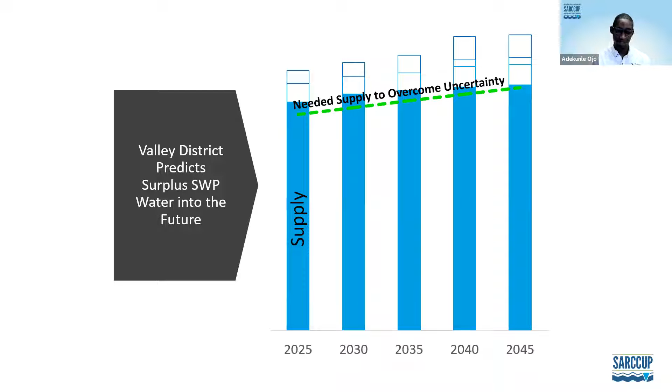Next slide. And we just want to show you that this is no wishful thinking. We've had surplus State Water Project water in the past, and even in the face of climate change, as indicated in the last slide, we're still forecasting future surplus State Water Project water. As you can see, between the decade of 2002 to 2012, Valley District sold to Metropolitan almost 220,000 acre feet. That's a lot of water. Next slide.

This slide depicts that in addition to the projected surplus water from Valley District, the State Water Project itself has surplus water in wet years. Depicted here is the period between December 2016 and March 2017. What you can see between February and March is additional wet year surplus that Valley District can have access to, and when that becomes available, it can be provided to our partners.

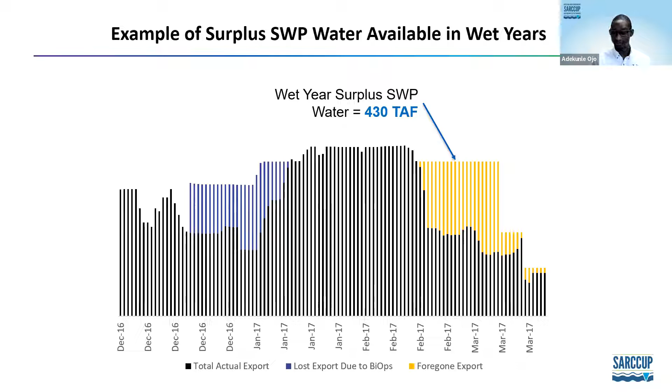As indicated in the previous slide, you can see that in the past, when surplus water was available, Valley District sold it to Metropolitan Water District. Part of the challenge with this arrangement is that the water was not necessarily stored in the watershed.

In setting up SARCCUP, one consideration is how do we keep some of that surplus water, when available, within the Santa Ana River watershed? So this is the initial thought: Valley District, when it has surplus water, will provide it to Yucaipa Valley Water District and San Gorgonio Pass Water Agency, up to 5,000 acre feet. The reason being that Valley District, as well as the Pass Agency, are state water contractors, and Yucaipa Valley Water District is a common customer in the Calimesa area.

After the initial 5,000 is provided, any surplus water is then provided to Metropolitan, and Metropolitan provides it to the watershed. However, Metropolitan was not very happy with that arrangement. There's some governance and institutional reasons why it might not be feasible to provide the entire surplus water provided to Metropolitan to the watershed.

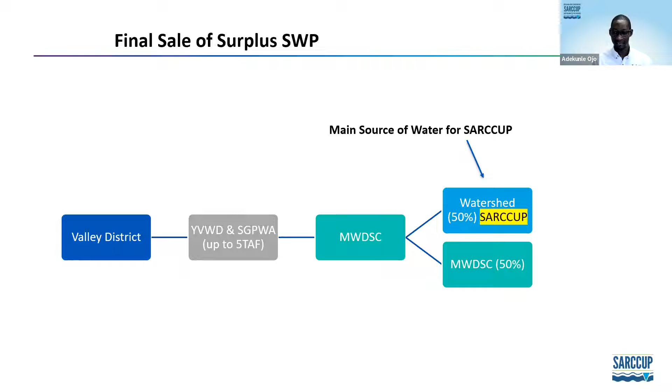So a compromise was reached. Yucaipa and San Gorgonio will still get up to 5,000 of the surplus, and when it's provided to Metropolitan, the compromise was that Metropolitan will provide 50% of the available surplus to the neighboring agencies, and that is SARCCUP.

Again, to remind you, up to this point, what is Valley District's role in SARCCUP? Valley District's role is providing the water that its neighbors then store in the SARCCUP program. So Valley District, at the top of the watershed, is a state water contractor providing its surplus water to neighbors who are largely Metropolitan member agencies, and they obtain the water and they store it.

There are three elements in the SARCCUP program: habitat improvement, being number one - Arundo removal and Santa Ana sucker fish habitat restoration, which Adam might touch on later. There's a water use efficiency component to it, and the largest component is the groundwater bank, with the goal of storing wet year water. When there's flood, when there's a lot of liquidity in the system, storing that water to serve up to 3 dry years in the future.

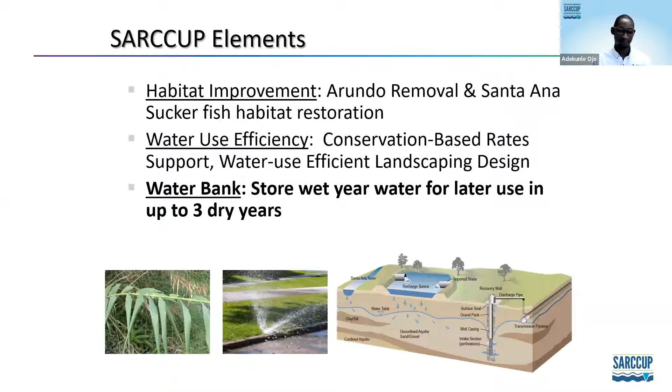As indicated in the previous slide, the largest component of SARCCUP is the groundwater bank. The partners received a $55 million grant as part of the Proposition 84 grant. I want to say thank you to the Santa Ana River Watershed Project Authority and the state taxpayers for making that grant possible. But the groundwater bank is the largest element of both the grant as well as the overall program, costing about $162 million.

Storage is the great equalizer. Just like many of us, we save for uncertainty. I compared this to some of us who have the promise of a pension, but because we don't know what the future holds, we lay on top of that a 457 plan, a 401A plan, some brokerage accounts, some savings, just so that we are well prepared for the future. And this is no different.

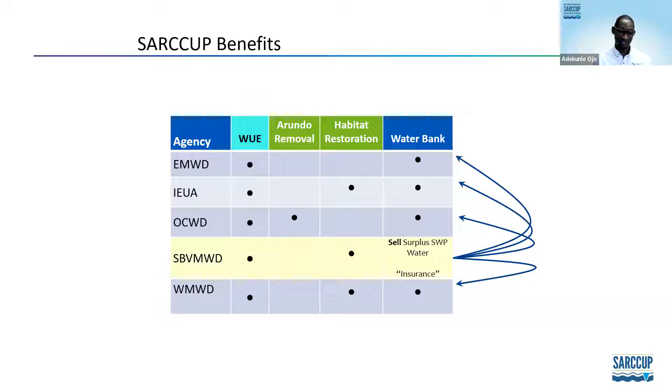On this slide are the program elements and the benefits. One thing you'll notice is that every agency is part of the water use efficiency element. Orange County Water District is the only agency in the Arundo removal. Arundo is an invasive plant that consumes a lot of water, so taking that plant out of the watershed reduces water consumption and evapotranspiration. You'll also notice that on habitat restoration, you have a couple of participants, but on the water bank, every agency is participating. The water coming from Valley District, and every other agency storing that water, becomes a form of additional insurance for the Valley District service area.

As I mentioned earlier, the Santa Ana River Watershed Project Authority manages regional collaboration in this watershed. There are two Project Agreement committees, that's what PA stands for. PA 23 has oversight over the water bank and habitat component of SARCCUP, and Project Agreement Committee 22 has oversight on the water use efficiency component.

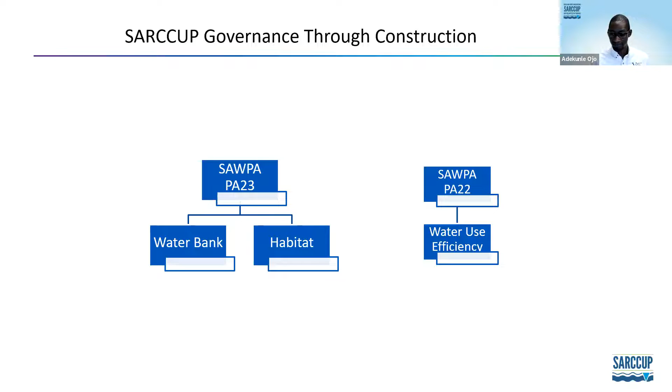Groundwater basins are not visible, so we don't tend to appreciate their scale. This slide compares the SARCCUP groundwater bank to surface reservoirs. Most of us are very familiar with Lake Perris—SARCCUP is around the size of Lake Perris. As a groundwater bank, it's bigger than Lake Silverwood, bigger than Big Bear, bigger than Lake Arrowhead. So it's a decent sized bank.

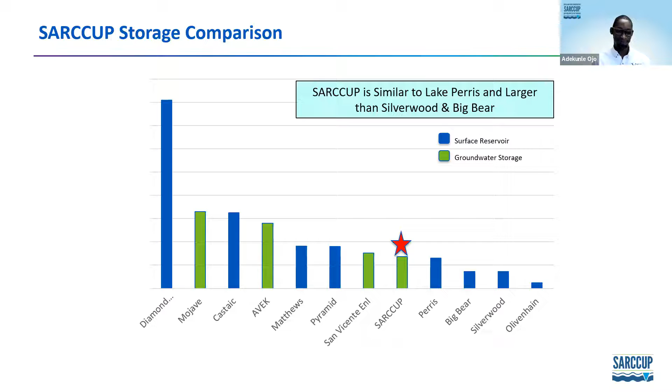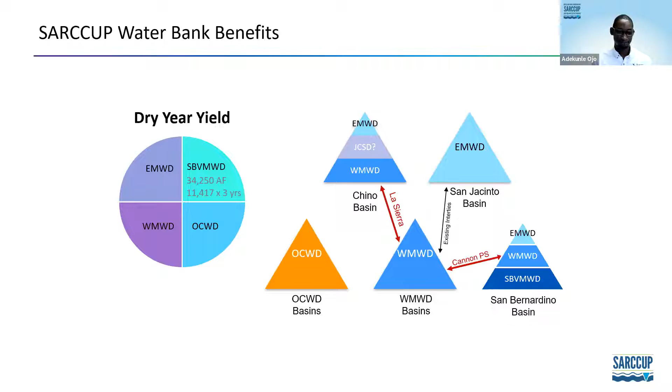This slide shows some of the additional facilities put in place to allow for both the banking and the retrieval of the stored water. This is not showing existing or old facilities, but new facilities. One advantage of the SARCCUP facilities is that they can be used to move this SARCCUP water as well as other water—in other words, some of these facilities are multi-beneficial in nature.

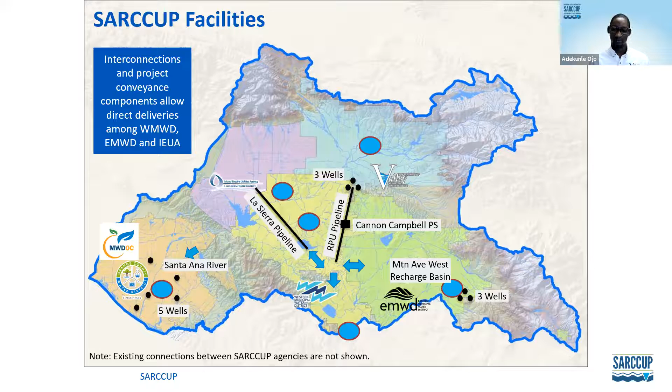I'll stop at this point, but to summarize: SARCCUP starts with Valley District providing the water to partnering agencies who store the water, and that water can be retrieved in dry years as an additional supply source. At this point in the presentation, I will hand over to Adam, who will present on the Orange County portion of the program.

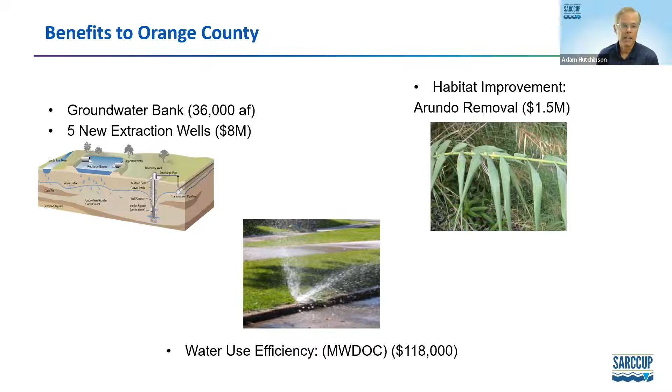So what are the benefits to Orange County? We get access to new water, like Adekunle said, the State Water Project. But we also have the option to buy water and wheel it through Metropolitan to our area. So if we want to go out in the open market and buy water when it's available, we can do that in addition to the State Water Project water. The goal is to bank it during wet years whenever they happen, put that in the ground. Dry years seem to be increasing in intensity, so we need to bank that water when we have it available.

5 new production wells will be constructed that will help our groundwater basin be more resilient in terms of extraction capacity, so when we call on that water during dry years, we have sufficient production capacity to pump it out and deliver it. The arundo removal I mentioned earlier, that's a very thirsty non-native plant, and we're removing enough to save 2,400 acre feet of water per year into the future. And of course, there's also the water use efficiency component of the project.

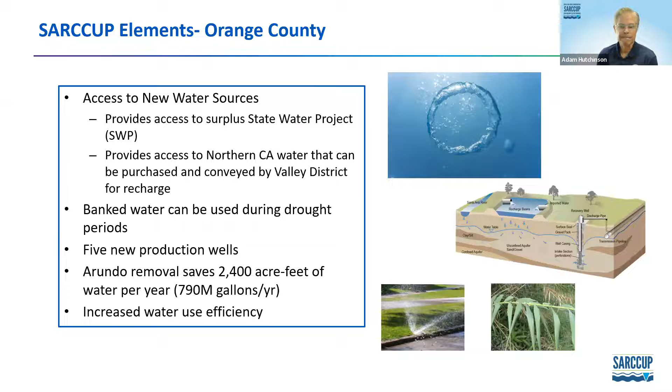For the 5 new production wells, these are the agencies and cities that received grant funding. Grant funding really helped leverage the existing investments in these wells, over $25 million in cost, and we're happy to be able to provide this grant funding to these 5 cities and retailers. All these wells have been drilled right now, and they're basically being fitted with equipment, pumps, and so on.

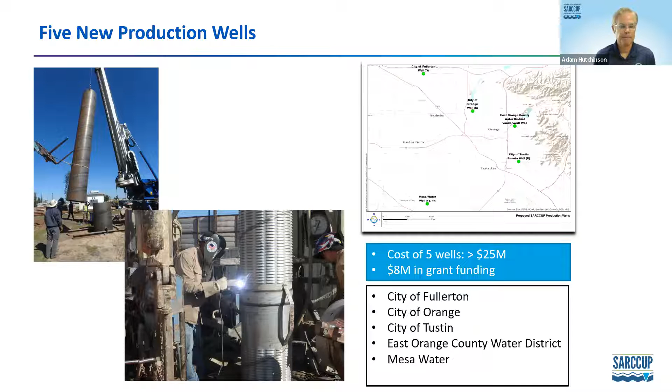This is a picture of the kind of equipment we use to remove arundo. Most of this arundo is behind Prado Dam along the Santa Ana River. You can see the arundo behind this machine, very tall grass, actually the largest species of grass. It looks kind of like bamboo. It's a very water thirsty plant, burns very hot during fires, so it's a fire hazard, and it's really important to try to eradicate and remove it from the watershed.

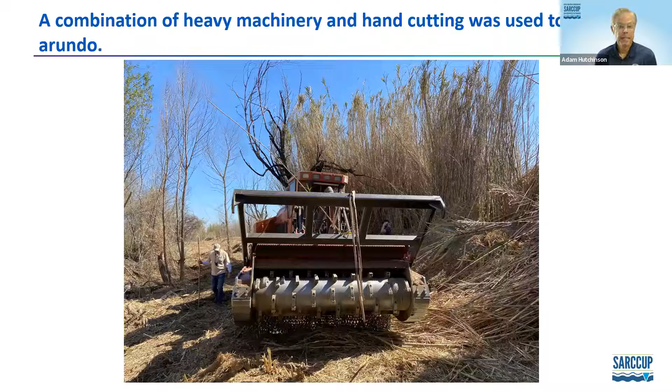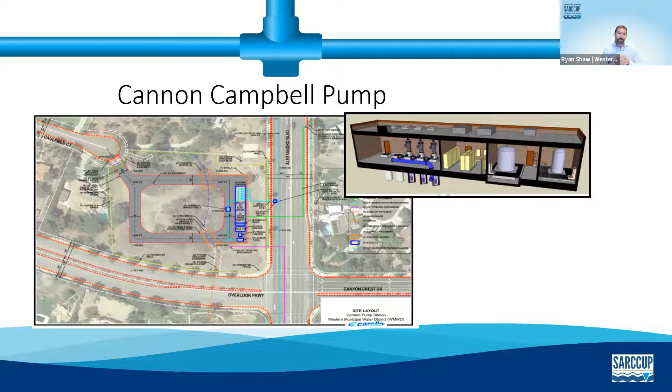So why is this project really important? I wanted to focus on this one because I think it goes to the core and heart of what SARCCUP is all about. It's about partnerships and working together and finding ways to be more local supply resilient for emergencies and for regular water use. Right now, in the middle of this drought, is a perfect example of when the water bank could be used — hopefully we'll be ready for the next drought.

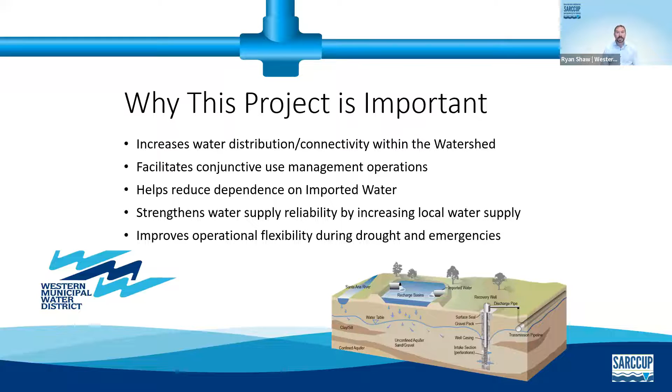So I mentioned multiple water sources. This pump station is kind of the hub of our regional system now. We can take water from the Chino Basin via the Chino Desalter Authority. We can take water from the Riverside Arlington Basin, as well as get water from the San Bernardino Basin all the way up near the foothills. For the Riverside and San Bernardino Basins, we have a partnership with Riverside Public Utilities where they actually pump and deliver the water to Western on our behalf. And then finally, the pump station can take all of these local groundwater sources, and it can actually what we call reverse flow.

It can take water out of the Metropolitan's Mills treatment plant, so it can flow water in multiple directions. I'll show you a little graphic on that in a second.

Okay, so this is just a little schematic. I know there's a lot on here, but bear with me.

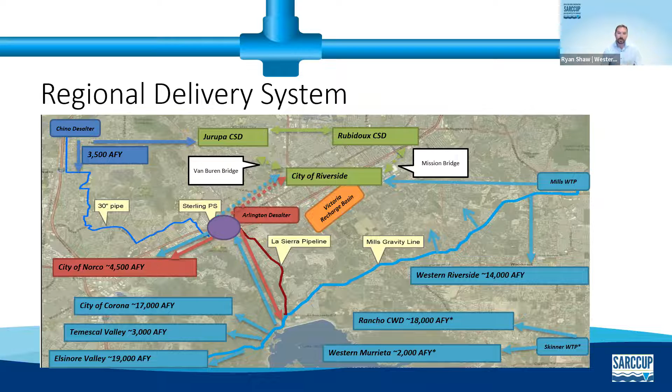The big purple dot right there in the middle, that's the Sterling Pump Station, right at the 91 freeway. In the top left corner is the Chino desalter. We can move about 3,500 acre feet per year to the pump station and deliver it in multiple directions to multiple customers. You see the city of Norco in red and the Arlington desalter right there in the middle. We can move Arlington desalter water in multiple directions, and that's what those red arrows are indicating. All the other agency names and their acre foot numbers represent our existing imported water system. In the top right is the Mills Water Treatment Plant, where many of our agencies get imported water through Metropolitan Water District. What's really unique about this Sterling pump station is that it's now a regional hub to move multiple sources of water in multiple directions.

Next slide. Here's another simple schematic to give you a better visual of how complicated it is. At the site we have a 1.1 million gallon reservoir and 6 pumps that will eventually lead up to 30 CFS delivery capability. 4 of them are gas powered, 2 are electric powered. You can see the arrows going in multiple directions with multiple water sources.

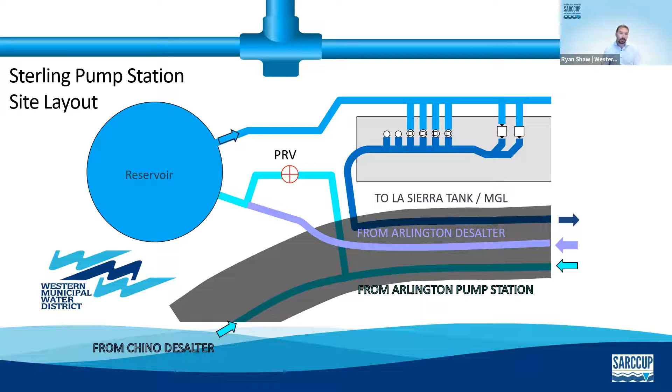This is a brand new operation for Western's operations team, and we successfully moved water from the Chino Basin all the way up to the Mills gravity line, which can feed all the way down to Elsinore Valley Municipal Water District. So we're able to move water across the region, not only stored SARCCUP water, but local groundwater that comes out of each of those respective basins.

Next slide. I have 2 more slides. Just want to share some photos. These 6 photos are during construction of the La Sierra pipeline. For those who have driven on La Sierra, it's a fairly well-traveled, large street, so you can imagine all the outreach and disturbance that occurred building a 5-mile pipeline. But our team is really proud, we actually got compliments from the public and a few schools near where we had to construct this pipeline. We did a very good outreach program, which made the process a lot easier.

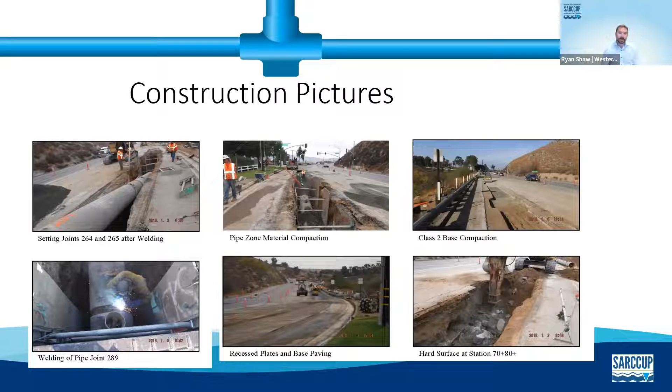And I think that's my last slide, and I will turn it over to Leighanne Kirk for Eastern's update. Thank you, Ryan.

My role in SARCCUP is as the lead staff member for the program, and the engineering department is the lead on Eastern's SARCCUP project implementation. With that said, I will do my best to describe the project with the upcoming slides.

Next slide, please. First I'll give a little overview of Eastern. Eastern was established in 1950 and provides water, wastewater, and recycled water services to a population of nearly 1 million people, both wholesale and retail. We serve about a 560 square mile area and are currently only 38% built out, so there is a lot of growth potential that Eastern is constantly planning for in this region.

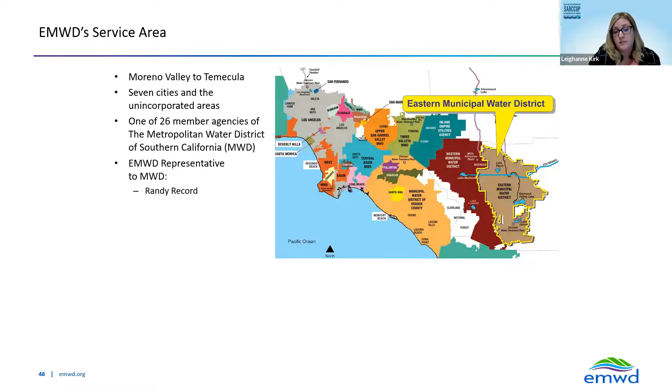Our core services include providing drinking water, wastewater collection, and recycled water. About 83,000 acre feet of potable water was provided in 2021 from a combination of imported water sources, groundwater wells, and brackish desalters. Eastern also operates 4 regional water reclamation facilities with a daily average of 47 million gallons, and provides over 33,000 acre feet of recycled water to a variety of agricultural, municipal, and environmental use customers throughout our service area.

Eastern takes both imported treated water and imported raw water from Met. The map here depicts the locations of these facilities, as well as the locations of the groundwater wells and the brackish groundwater wells within our service area.

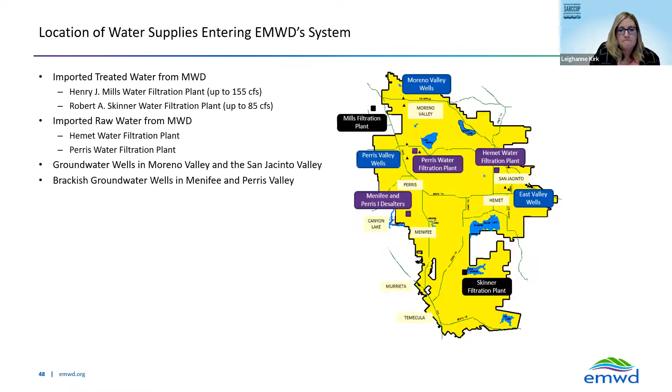The next few slides I will show will highlight Eastern SARCCUP facilities that have been partially grant funded through this program.

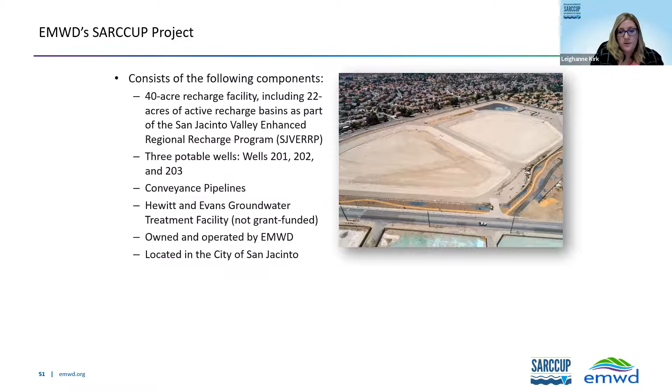We are receiving approximately $12.7 million towards the construction of the 40-acre Mountain Avenue West recharge facility, as you can see in this picture, which is a component of our larger San Jacinto Valley Enhanced Regional Recharge Program, plus the addition of 3 new potable wells, which we call wells 201, 202, and 203, as well as conveyance pipelines. The Hewitt and Evans groundwater treatment facility is also being constructed through this program, but is paid for with Eastern funds, not utilizing the grant funds. These sites are owned and operated by the district and located within the city of San Jacinto.

Here's an aerial of the Mountain Avenue West recharge facility that includes 3 separate basin facilities. One is a stilling basin that will settle out the silt prior to water flowing to basins 1 and 2 for recharge. This approach minimizes silt getting into the recharge basins and therefore reduces maintenance.

The recharge basins have the capability of recharging up to 30,000 acre feet per year. For the SARCCUP program, Eastern is dedicating 19,500 acre feet for storage, which you've probably seen on previous slides, or 6,500 acre feet per year over a 3-year period, if you consider that on average there are 3 wet years out of every 10 years.

It's also worth mentioning that nearly 400,000 cubic yards of soil was exported off-site to the Soboba tribe who wanted the soil. This equates to roughly 27,000 truckloads during the course of construction.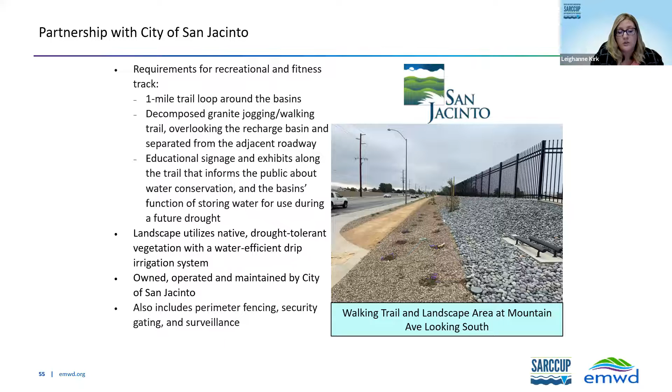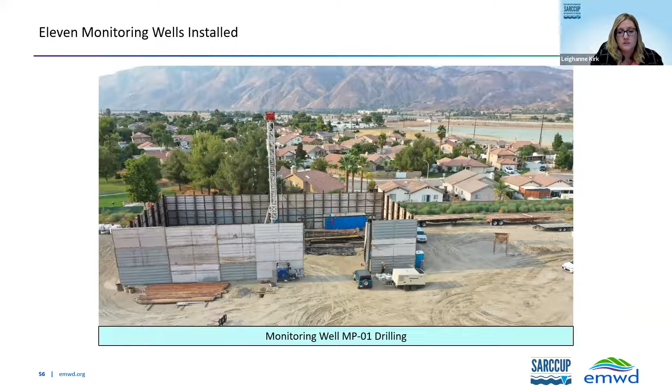The recharge facility was dedicated last year on October 28th, 2021.

So this facility is fully functional. And once the 3 wells are completed, as well as the treatment facility, the full SARCCUP project can be realized, and groundwater will be able to be pumped and treated from the banked water from SARCCUP from recharge into the Mountain Avenue West facility.

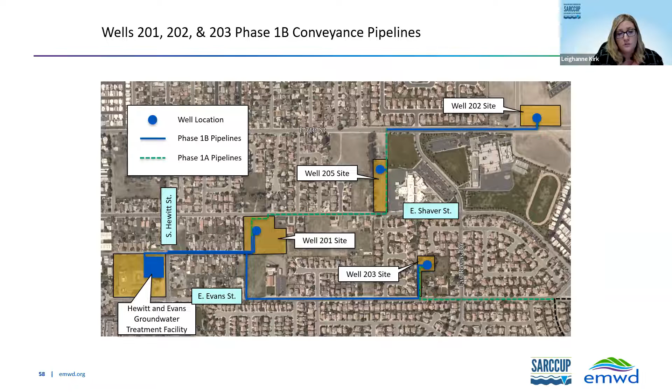And this map shows the locations of the well sites I mentioned and the conveyance pipelines. We are also implementing well 205 as part of this project, but that isn't grant funded, but it will be part of the water banking program for SARCCUP. So the well drilling and conveyance pipelines are complete. The well equipping is under construction, and the treatment facility will be under construction soon.

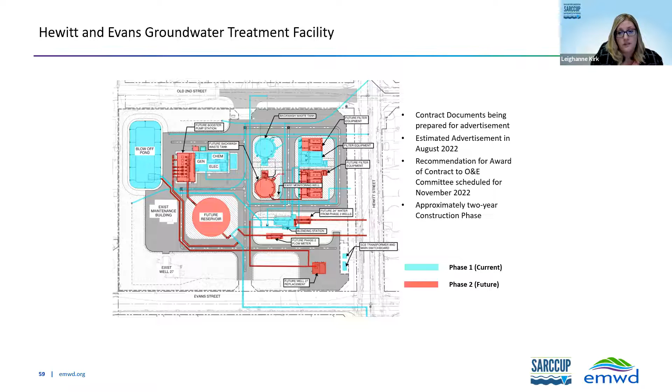Next slide. So as part of the operations component of SARCCUP, the operations committee, which comprises the basin agencies on this panel today, will utilize a software tool to track and manage the transactions that take place.

So several years ago, we identified the need for some sort of data management software program to track the complex transactions that will involve the movement of both physical and paper water between the multiple agencies, the financial tracking and reconciliations associated with those transactions, the ability to monitor the status of multiple groundwater basins and the volume of banked supplies available, facilitate communications and coordination between the agencies and the operating committee, and to support agency planning needs.

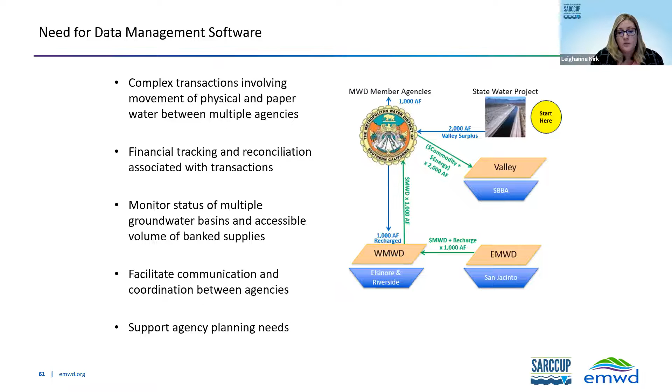So the agency contracted with a company called DBS&A to develop this tool, and they started working on it earlier this year with Eastern staff as the technical lead.

Next slide. So some of the core key tracking functions for the paper water include the offers to import water for banking, purchases of offered water by SARCCUP agencies, and transfers and exchanges of banked water. For the physical water, recharge of purchased water into designated basins, extraction of the banked water, and conveyance of the water to be recharged or banked or extracted for consumptive use.

And the tool also has the functionality to see at a glance the available volume and capacity to support the invoicing for the multi-agency transactions that we envision taking place, and also to support agency reporting requirements.

And the tool will be used by each of the SARCCUP basin agencies to input data and be able to generate reports, as required by their own agency or other stakeholders, such as the water masters. And also this will help provide an annual reconciliation that each agency may need to perform with Metropolitan Water District, from whom we will be purchasing the water through SARCCUP.